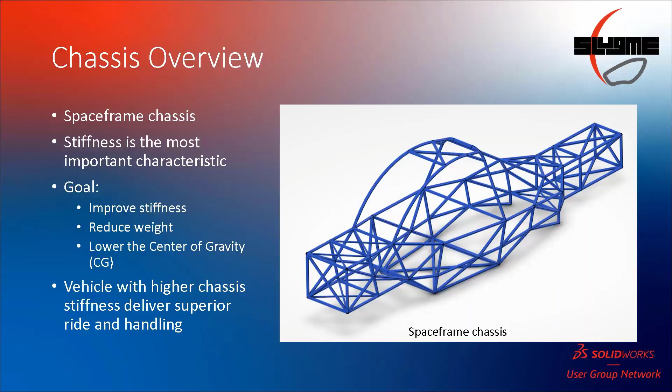So I sent out a message to Jordan recommending some changes. You may have seen it in his presentation, but in case you missed Jordan's presentation, here's the message for you.

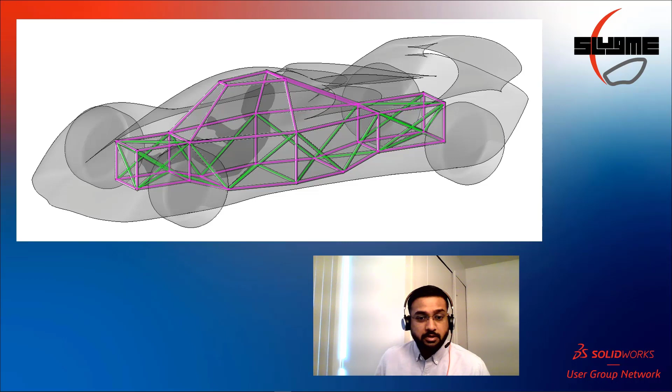Hey Jordan, how's it going? I wanted to reach out to you, tell you that I ran some simulation on our first design iteration and the results look pretty great. I think we have a really great first design that we can build on. Though I also have some recommendations based on the simulation results that I feel can be a great improvement in our second iteration. So let me quickly show you a couple things.

So the first thing that I definitely would like to see is if we can add a few cross members, if we can create that load path for the forces to transfer laterally and also longitudinally along the chassis, that will be great. I definitely saw a few hotspots on particular members or on particular nodes of the chassis in our first iteration. So I think we should definitely try and avoid that.

The second thing would be if we can just taper out the side impact structure of the chassis on the top side and just taper it in on the bottom side, also leaving some clearance for all the ducting, wire ducting and things like that. I think that'll be great. And then if we could add a fillet and avoid that sharp corner on the roll cage structure, I think it will distribute the stresses more evenly there as well.

So yeah, these are just a few things that I noticed based on the simulation results. Let me know what your thoughts are. I'll definitely run a new simulation if we get these changes and then see how it goes from there.

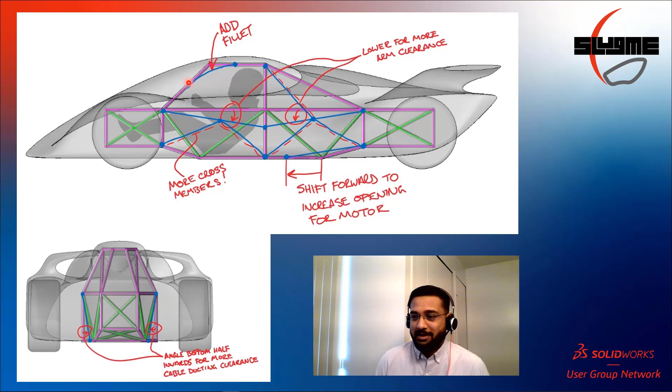Okay, let's see what Jordan came back with. Hey Shreyas, thanks for your video voicemail. I've received all your recommendations and I've implemented them. In fact, here's the model right here. You can see that I've added a lot more cross members.

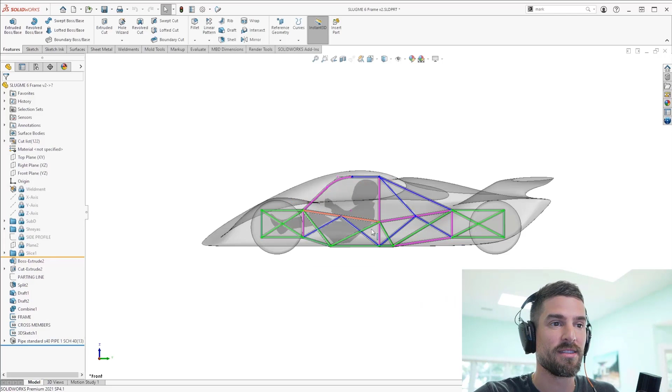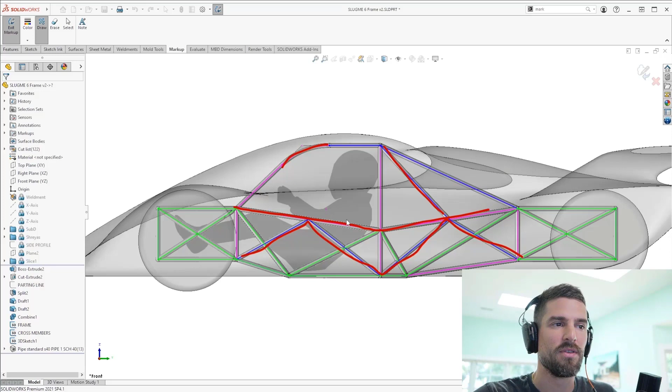If we take a look at this side view, I've zigzagged this cross member pattern across the frame, made the roll cage a little bit more robust, and added that round to the front of it like you said. I also brought down this little area right here, maybe giving the driver some more arm room. So check out how that might affect your simulation studies, and hopefully it keeps it just as robust or more.

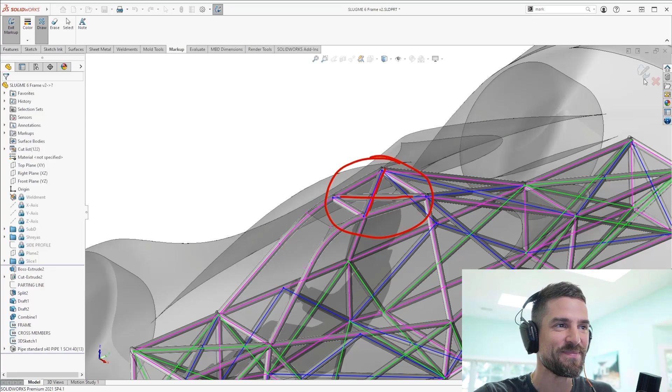Another thing that I did to strengthen things up is on the top of the roll cage. I added some cross members as well. So I figured, hey, if we're rolling this thing over, we want to make sure we keep that driver's head safe and secure.

The final thing, let's go to this view right here. You can see that I've tapered in the bottom half of the frame for that side impact load, and also to open up an area for our cabling and ducting for our wires and electrical lines. So I think we'll have plenty of room for that. Hopefully the side impact will be even stronger. Let me know. Hopefully all these changes are in the right direction, Shreyas.

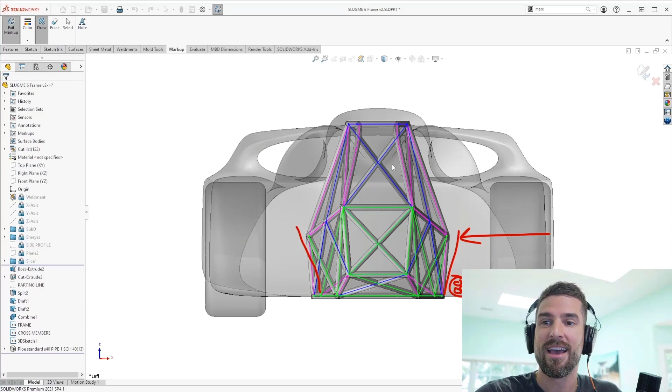All right. So now that you all have an insight on how Jordan and I went about making these design changes, let me explain the workflow I followed to set up the model for determining the hub-to-hub torsional stiffness. The setup is similar to a typical test rig that you may have seen. On a test rig, you usually clamp one end of the chassis and twist it about the other end. The twist can be accomplished either through the application of a torque or by applying a bump force on one of the wheels.

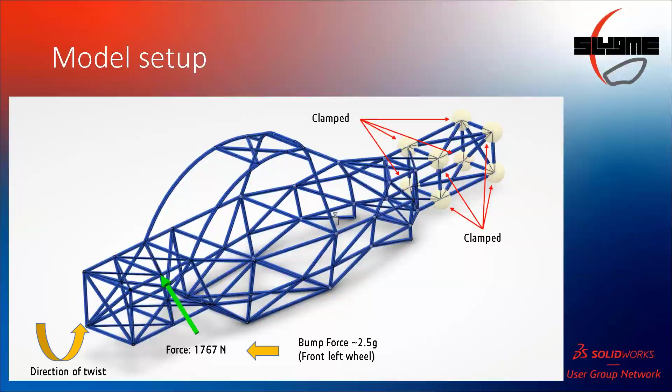Now, let me walk you through the setup process and also show you some tips and tricks along the way. So the setup process that I'm going to show you is on the design that we think is going to be our final iteration. Now, the starting point for me is really the point where I get the design from Jordan. Now, the important thing to note here is I'm only going to perform a 1D static analysis on this frame. So what I really need from Jordan is just a 3D sketch, and I'm all set to set this model up.

So the first step for me is to get this component from SolidWorks onto the 3D Experience platform, because that's where I'm going to perform my analyses. Now this step is super simple. From the SolidWorks connector that is inbuilt into your software, all you have to do is select the component, click on the compass in the top left corner, and select the appropriate app that you wish to open this file onto the 3D Experience platform. Now in this case, I'm going to set this model up using the mechanical scenario creation application on the platform.

Okay, we are now on the 3D Experience platform and in the mechanical scenario creation application. I have already set this model up before this presentation started and would like to use it to discuss the setup process. But what now? Remember, we only got the 3D sketch on the platform. We don't have any cross-section data associated with it. So how does the software know what exact cross-section these beams are made of? Well, honestly, it does not, unless you specify something.

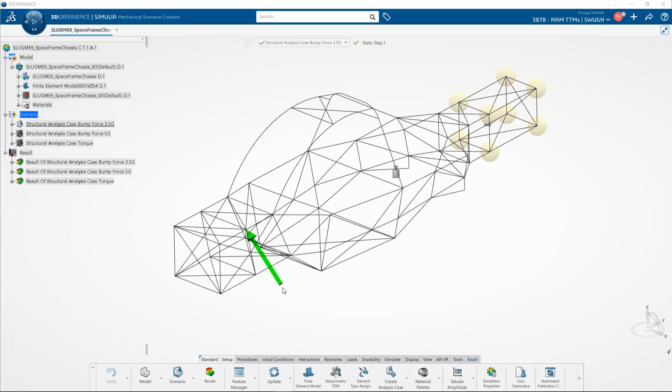So that's the first thing I have done. I have created different profiles, and then I apply these different profiles on individual members of the chassis. So for example, I have created a beam profile of 1 inch outer diameter and 2.4 millimeters thickness, and then I'm applying this profile to the main hoop on the chassis as seen in the graphics area. This beam section has a material associated with it, which is SAE 4130.

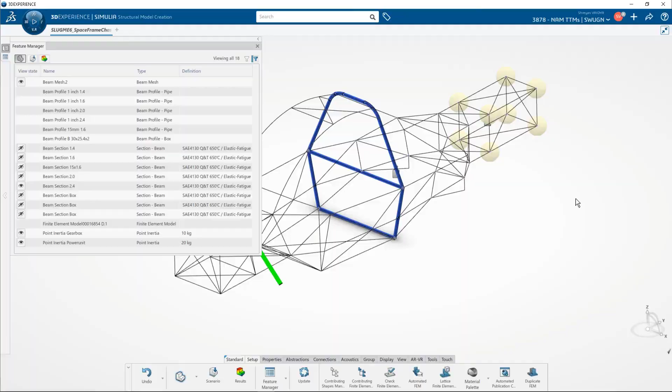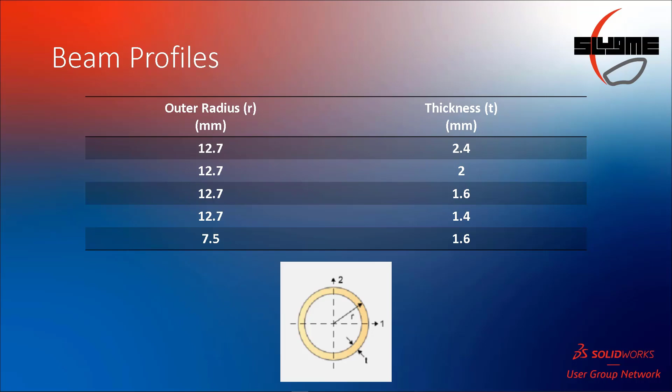In addition to this beam profile, I have created some other beam profiles with mostly 1 inch outer diameter pipe with 2.4, 2, 1.6 and 1.4 millimeters of thickness. I also have a profile with 15 millimeters of outer diameter and a thickness of 1.6 millimeters. Now, all of these profiles have been assigned to specific members on the chassis, as you can see here in the graphics area.

Now, the next step for me was to create a mesh on this model. We create a mesh to discretize the model into finite elements. Now, I'm using a mesh size of 4 millimeters and a tolerance of 0.1 millimeters to mesh this model. So, a quick recap. We have created the beam profiles, we have assigned the materials, we also meshed this model. What should be our next step? We have to twist this chassis in such a way that we can study the stresses, study the displacement on different nodes and different members, right? So that's what we are going to do.

We're going to start off by creating some restraints and then apply a certain load on a specific location on the chassis. So for this, I have created a clamp on the rear suspension pickup points. So basically I'm giving the software a few points, which are where all the rear suspension components connect with the chassis, and I'm telling the software to clamp all of these points. In addition to this, I am applying a bump force of 2.5 G at a point where we are going to connect the spring and damper system on the chassis at the front.

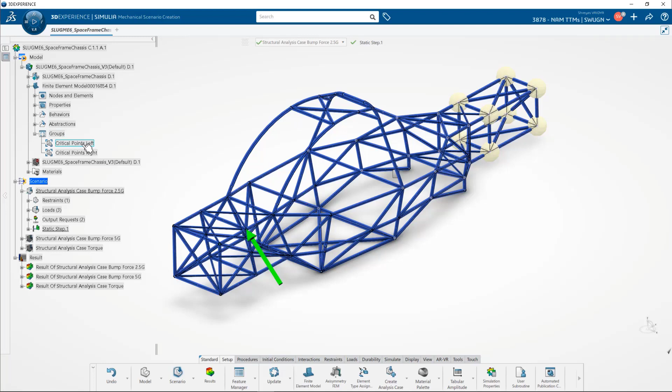So there are several critical points on the chassis. These are the points where I wish to study the stresses and displacement in much more detail. So before solving this model, I have created some geometric groups. Now, these geometric groups consist of all these critical points. The benefit of doing this is when you're studying a specific contour plot, you can request output on these geometric groups. This way, you can study all the critical points at once.

Okay, so those were some key steps in setting up this model. So I went ahead and solved this model using 12 cores on my local machine, and it was pretty fast since it's a static analysis problem.

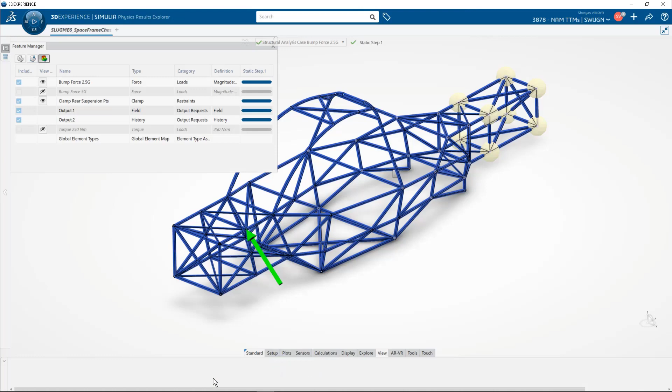It took around about a few seconds. But let's say if you're working on a really complex problem, something like a crash simulation or a drop test, which is an explicit analysis case, you also have the option to solve it on the cloud. And on the cloud, the maximum number of cores that you get is 144, which can be very fast when compared to your hardware specifications in some cases. So just wanted to throw this out there.

But yeah, let's go ahead and take a look at some key results. So what you see on the screen is a stress contour plot. To start off with, you can really point anywhere on the beams and you'll get a stress value. This is a very interesting feature.

But I'm also interested in knowing the location of this maximum stress point on the chassis. So we can obviously determine from the legend here on the right hand side that the maximum stress induced was 141 megapascals. But as I said, I'm more interested in knowing the location of this maximum stress point. This will help me better iterate my further designs if that is something I'm looking for.

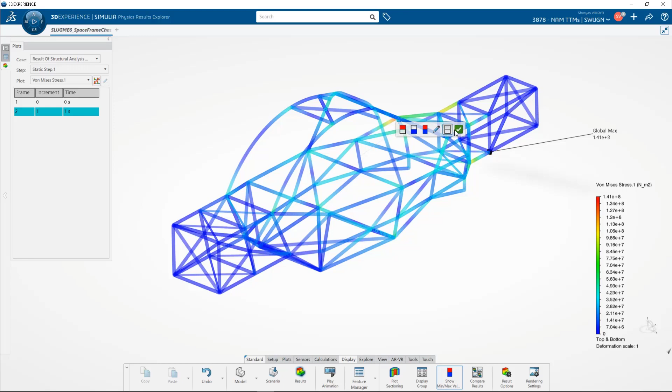So for this, I'm going to click on show minimum and maximum values and then switch to maximum only. So this will give me the exact location of the maximum stress that is going to be induced. Let me turn this off real quick so that we can move on to our next result.

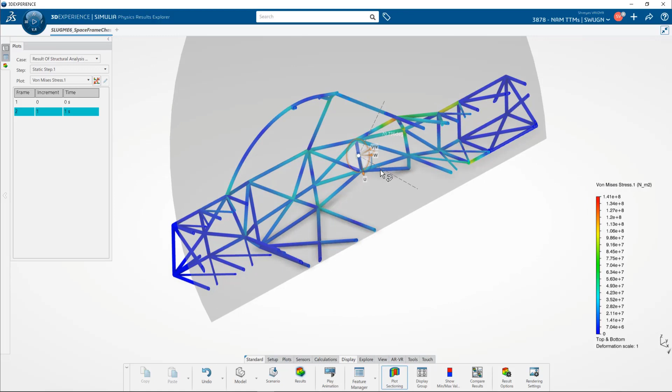Now, if you want to turn the geometry on, in our case, it's a 3D sketch, you can do it from rendering settings. This way you can visualize your original geometry in this contour plot. You can also plot a section view using the plot sectioning option. To set a view, you can either rotate or drag the triad about a certain axis.

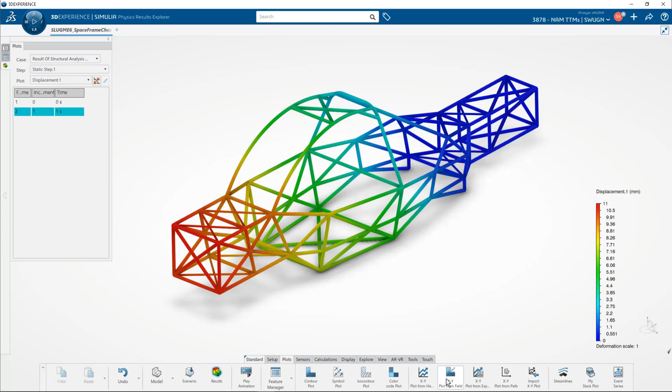I am now going to switch to the displacement contour plot. This is one of the key results for us. In addition to this, I'm going to request an XY plot from field. Now this XY plot will contain information for displacement for all the critical points that we have created. So for support, I'm going to select node sets and set it to critical points on the left side.

Now my variable is set to translations and I'll set my magnitude to vector component 3, which is basically along the vertical axis, that is the Z axis. Now you see all the critical points are highlighted in the graphics area. These are the critical points that we have included in the group called critical points left.

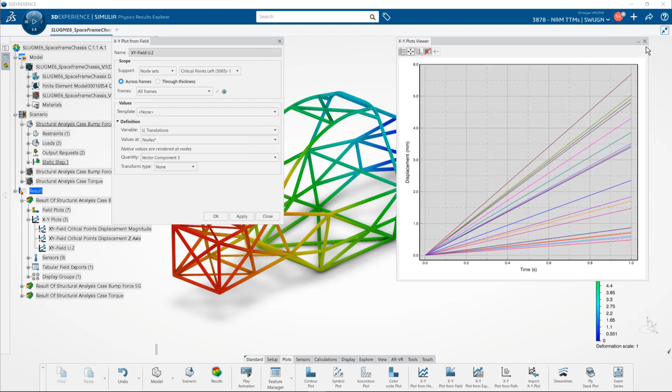I'm going to say apply and you will see a plot which basically is a displacement versus time graph for all these critical points. The curves indicate their displacement with respect to time as the force is being applied on the chassis. So as I said, this data is very important to us. We'll need it to plot a torsional stiffness curve for the chassis.

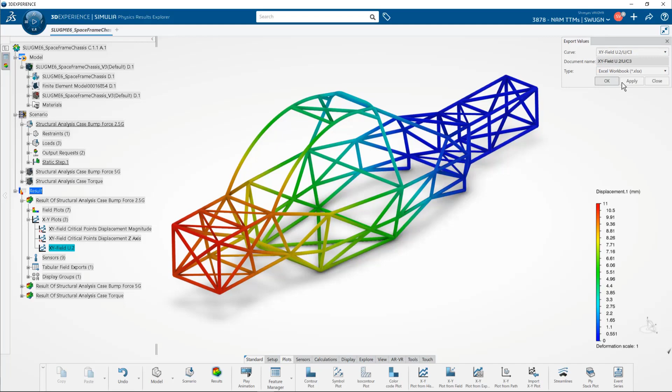So what I'm going to do is export this data into a format that is easy for us to get the values from. So to do this, I'm going to right mouse click the plot that we have just created from the design tree, click on export, and then set the type to Excel workbook, and then click apply and then OK. So this is the Excel workbook that we get.

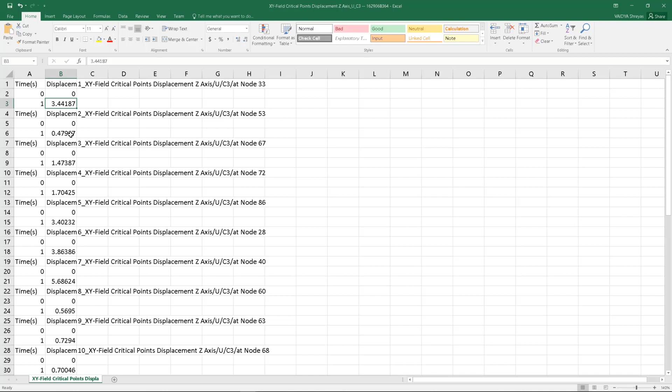Now how do we read this? Well, to start off with, node 33 will have a maximum displacement of 3.44187. Similarly, the maximum displacement of all the 21 critical nodes that we have specified is going to be in this Excel workbook. So all I have to do is copy these maximum displacement values and then paste it into an Excel workbook, a program that I have set up to calculate the torsional stiffness of the chassis.

So as you can see, these are all the maximum displacement values of those 21 critical nodes that I brought from the data that we exported into this Excel workbook that I have set up for calculating the torsional stiffness. So torsional stiffness is nothing but the torque required to produce a unit angular displacement.

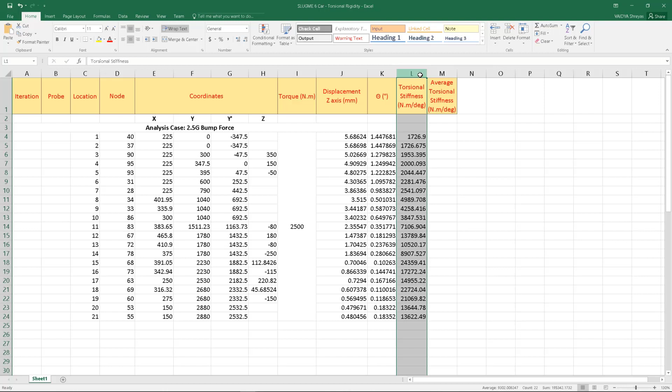Since we know the vertical displacement of these critical points and also their respective distances from the center plane, we can calculate the degree by which these critical points were displaced. And since we also know the force and the location of the force that we have applied, we can calculate the torque that was required to produce these respective angular displacements. And that will give us the torsional stiffness for each critical point.

Okay, so now that we have calculated the torsional stiffness for all the critical points, let's see how our stiffness curve looks like. We have plotted these stiffness values on the y-axis, whereas on the x-axis, we have the location of these critical points about the length of the chassis from front to the rear. Now this curve represents the increasing torsional stiffness of the structure as we go from the front to the rear. The y-axis value of this curve corresponding to the x-axis value of 0 will give us the torsional stiffness at the front axle.

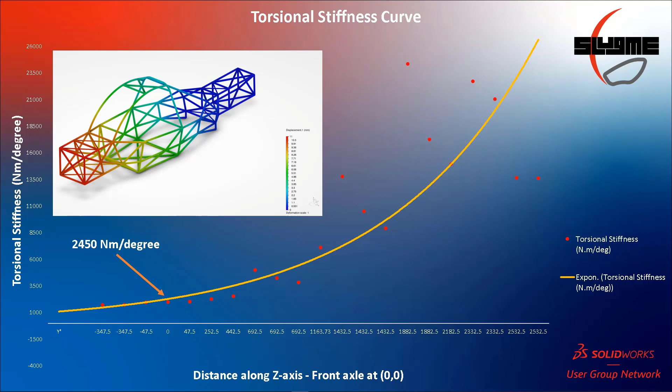So the torsional stiffness at the front axle comes out to be 2450 Newton meter per degree, which in layman's terms means it will require a torque of about 2450 Newton meter to displace the structure by 1 degree at the front axle. Now this curve, along with the data from the displacement and the stress plots, serves as a great starting point for a new design iteration. We build on Jordan's first iteration of the chassis by studying these KPIs.

Okay, what if this is not your last iteration? What if, based on the simulation results, you think you can make further design changes to make the structure more stiff or let's say make it lighter? In that case, what would be the most efficient way to make these design changes? It is just not feasible to start from scratch, right? Especially when you have made so much progress. Well, let me show you how you, or really anyone who is working on this design in SolidWorks, can make a new revision and push it back onto the 3D Experience platform for further simulation.

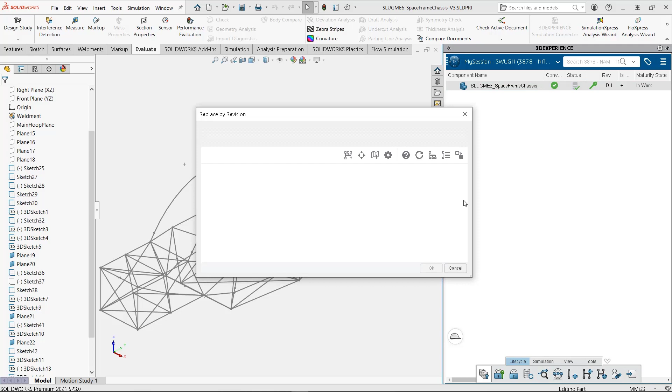So it did convert the file, and now it says that okay, a more recent version exists, and you're currently on D.1. So we want to switch to the more recent version, right? So what we can do is select this file and say replace file by revision. So a dialog box pops up and you see all the different revisions of this file. You see when it was created, when it was modified.

But let's select the current file. Let's select E.1 that we just created, the new revision, and let's click OK. So notice how the revision is changed here. Okay, we are again gonna give it some time. There we go. So we have the new revision now, but again, it is not reserved. So what I'm gonna do is I'm gonna select this guy and then click reserve. So now only I can make changes to this file.

And let's say if Jordan has access to this file, he won't be able to make any changes since I have reserved this file. And as you can see, the green key is right here. That means the reserve process is complete. All right. So now what we are going to do is we are going to select this crossbar. I know it's 3D sketch 18, so I'm going to select this. I'm going to say edit the sketch.

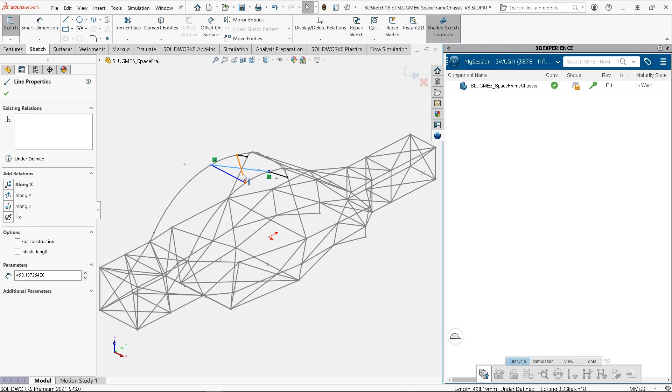Okay, instantly the status says that okay, the file has been modified in this particular session, and the current status is that you haven't saved this file. Okay, that's good to know. So I'm gonna select these crossbars. I'm gonna hit delete and then exit and save this model. Okay, so that's basically the change in this latest revision that I'm calling E.1. So I'll go back to the 3D Experience task pane, select this file, and then click on Save.

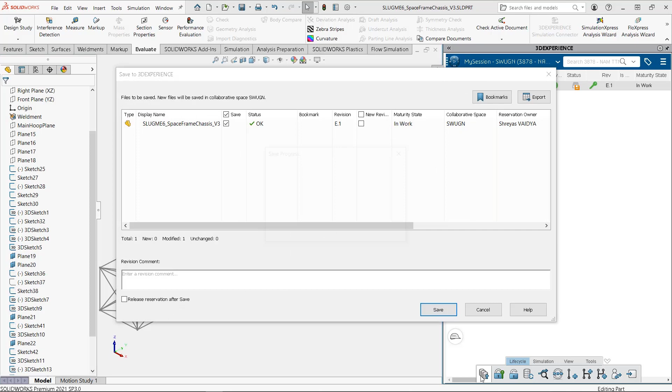So a good thing about this connector is, and as the name suggests, it connects your SolidWorks designs to the collaborative space on the 3D Experience platform. So any change you make is instantly updated on the platform. So you don't have to worry about saving your files on a local drive or on a flash drive, plug it in somewhere else, and then get that file onto the new PC and start working with it. It's all connected. That's the most important point to note here.

Okay, so there we go. We have saved the file. The file has been converted as well. Before we move on to the next step, that is basically pushing this file onto the 3D Experience platform, and this time we are going to do it slightly in a different way than you saw earlier. But before that, what I would do is I would unreserve this file so that it's free to open, and then if anyone wants to make any further changes to this design, then they'll be able to do this. Okay, so that's pretty much the workflow in SolidWorks.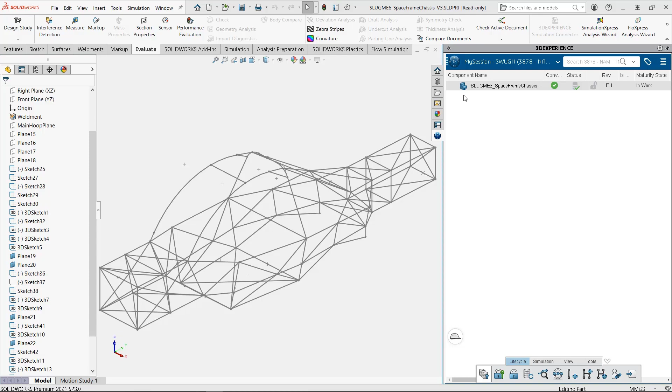Now we are going to go to the platform and see how we can replace our previous design with the current revision that we have. All right, guys, we're back on the platform. Now, before I replace this current model by the revision that we have just created, E.1, what I'm going to do is I'm going to create a new revision of the physics simulation itself. So the current physics simulation I have is this. So really all I have to do is

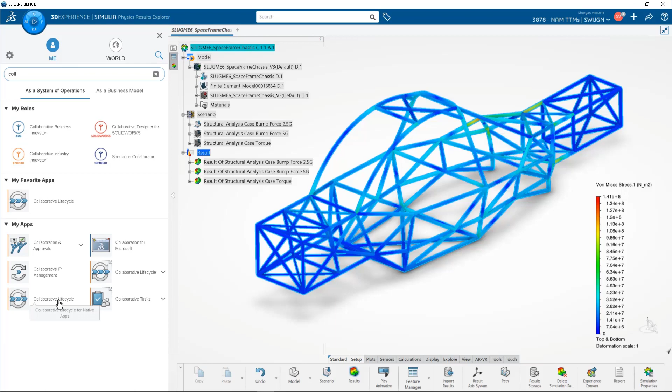select the current physics simulation, and I'm going to search for collaborative lifecycle application from the compass at the top. So once I have this, I'm going to just select the collaborative lifecycle application, and notice how I'm in the collaborative lifecycle for the native apps right now. So the action bar kind of changed. So as I said, let's create a new revision of the current physics simulation.

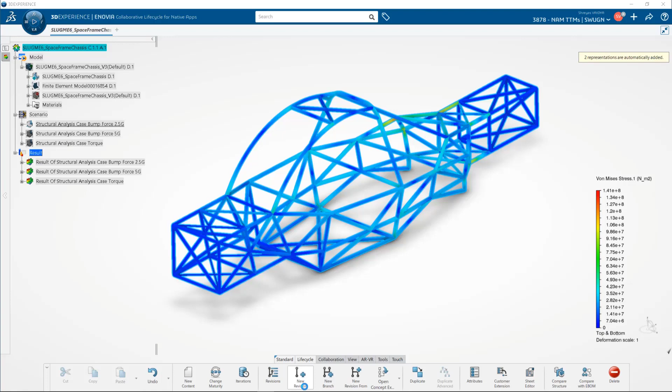So I'm going to select this physics simulation, and here from the lifecycle tab in the action bar, I'm going to click on new revision. So what I'm basically telling the software is I'm telling it to clone this current simulation that I have, current physics simulation that I have set up, I have simulated, and then also the results as well. So I'm going to say OK.

Okay, so it looks like the new revision was created and it has been opened in a new tab. The earlier one was called C.1.1 A.1, and this one is called B.1. So it is pretty much the exact clone of A.1.

Now, since we have everything set up in this simulation, it doesn't make sense to start from scratch working on the new design revision that we have. So that's what I wanted to show you guys.

Let's also quickly recap what we have done up until now. I know this can be confusing. We had some simulation results from the previous simulation, and we found out that we did not want those crossbars at the top. Those were just adding to the weight and increasing the center of gravity. So we went back to SolidWorks, made those design changes, and created a new revision.

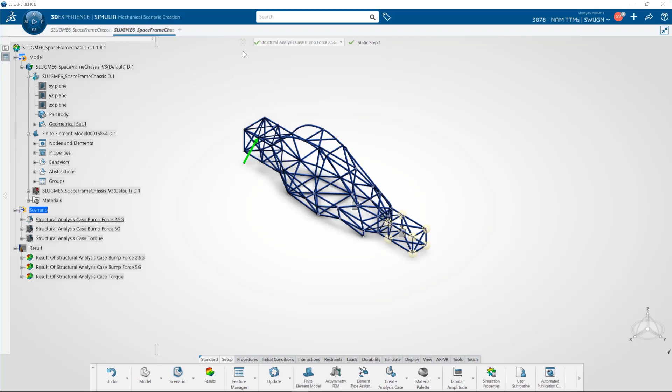We called it E.1, the design revision. It's important to note that revising a design and revising a physics simulation are two different things. So we revised the design from D.1 to E.1. We came back on the platform and revised our physics simulation from A.1 to B.1, that you see here on the screen.

Now what we are going to do is replace the current model that you see on the screen, because if you notice closely, it still has those crossbars, right? That's because the 3D part, the model that we have, is still D.1.

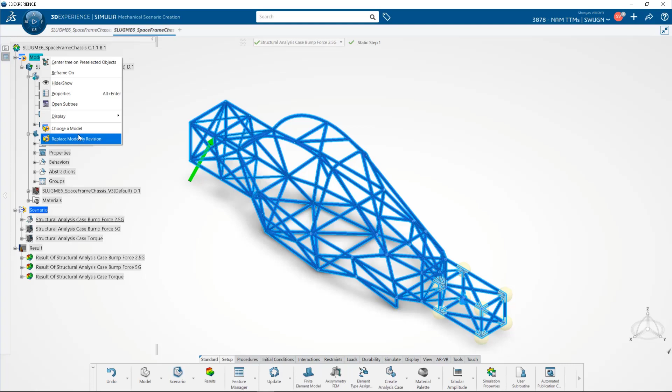So what I'm going to do is right click model in the design tree, say replace model by revision, and then I see the list of all the 3D parts, all the different design revisions I've created, along with some other data associated with it. For example, E.1 is our latest revision, and if I track this, I'll see the description: we are removing the crossbars that are at the top. So all I have to do is select the revision I want to switch to in this physics simulation, and hit OK. Let's give it a few seconds.

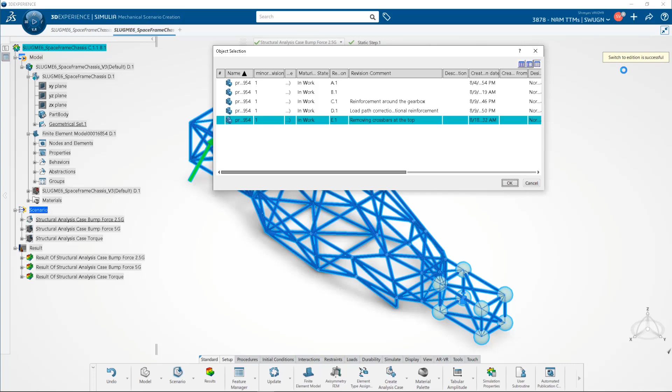As you can see, the current revision is D.1. It's just going to swap it to the latest revision, that is E.1. You'll see a short message here, switch to edition is successful. And that's really it. I know you still see the crossbars here at the top, but a quick update will basically fix it, and then you have to simulate the model again.

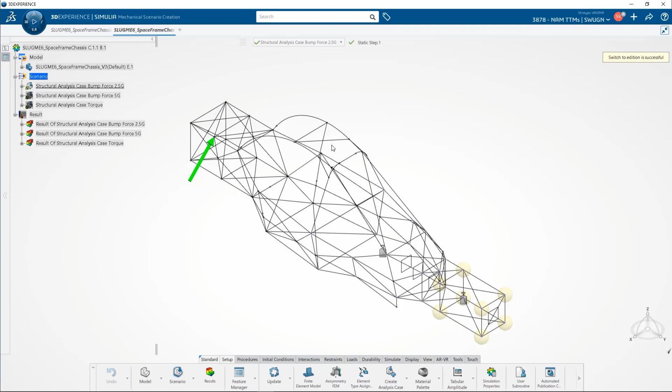So we are not going to go through that process all over again, we've already covered that. I just wanted to show you this workflow, how easy it is to go back to SolidWorks, make those changes, come back here on the platform, and simulate the model again to study your components and assemblies for the changes you may have made. So yeah, that's pretty much how the workflow is.

So the benefits. What exactly were the benefits, the main benefits from integrating a simulation workflow with an already existing robust design workflow? To start off with, we were able to do multiple design iterations in a really short span of time. This comes directly from some of our key simulation results, telling us these are some of the key areas we need to focus on in our next design iteration.

Since the workflow was very integrated, I was able to convey that message to Jordan: these are some of the key elements I want you to change. Jordan did that, and we brought our geometries, our structure, back onto the platform. I simulated it again and let Jordan know that some of the changes we made really did work, while some other changes we still have to look at. But yeah, to start off with, that's definitely the most important thing that comes from integrating these two workflows.

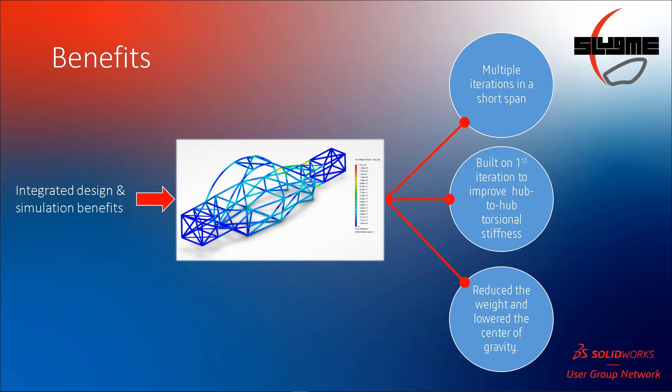So that is pretty much it as far as the simulation workflow was concerned. In reality, the next step for us would definitely be to fabricate this chassis and physically test it for all the parameters that we have based our design iterations on.

Throughout the presentation, you heard me saying structure solution on the platform, the structural mechanics engineer role on the platform, and things like these. So what exactly are these roles? To start off with, these roles offer advanced cloud-enabled capabilities powered by Abaqus. Let's take a deeper dive into these four different structure solutions, or roles as we like to call them, that are available on the 3D Experience platform.

Let's start with the structural designer role. This is an entry-level role mainly focused towards designers and engineers. If you're someone looking to perform a simple linear static analysis on your components to study parameters like stress, displacement, or factor of safety, then the structural designer role is probably the best fit for you. This role will also offer features to perform a frequency analysis or buckling analysis, and comes with features that let you set up a basic thermal simulation if that's something you're looking for.

Now, the structural engineer role sits slightly higher than the structural designer role in terms of features and capabilities. This role packs all the features from the structural designer role, but in addition also comes with features to help set up a linear dynamic study. So if you're looking for this, structural engineer is probably a good fit for you.

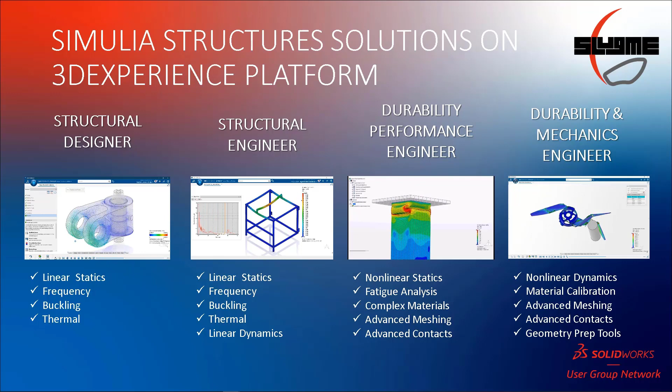So that was a very high-level overview of the structure solutions we have on the 3D Experience platform. On the fluid side, we have a role called the fluid dynamics engineer role.